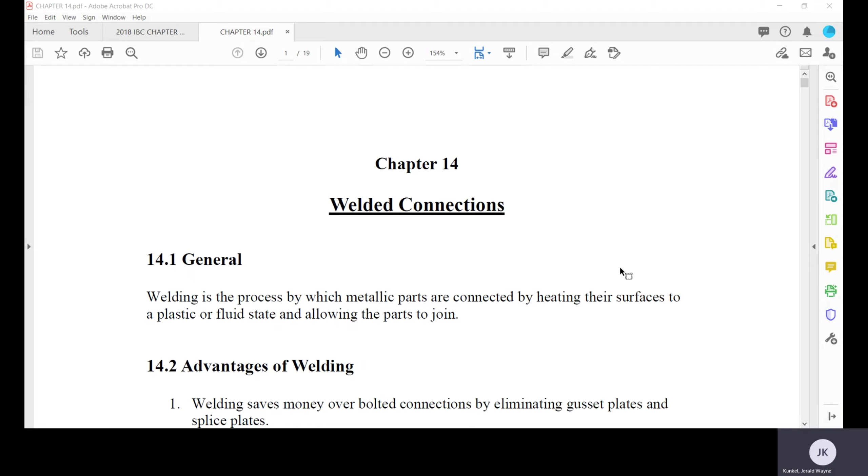So let's get started here. You need to have your welding mask on and your gloves to go through this, because this is pretty high tech stuff here.

You have to be licensed as a welder. There's a 40-hour course you can take at ITT or one of those institutional educational facilities - one of those tech classes you can find. You can learn how to weld. It's about a 40-hour course, and you're tested on the quality of the weld when you're done. You get a certificate suitable for mounting that says you are an official welder.

And if we were to look at specifications for structural steel, we would find specifications for welds, and we'll have time to take a look at that. That's one of those documents that can put you to sleep - it's the AWS, American Welding Society document that goes through welding.

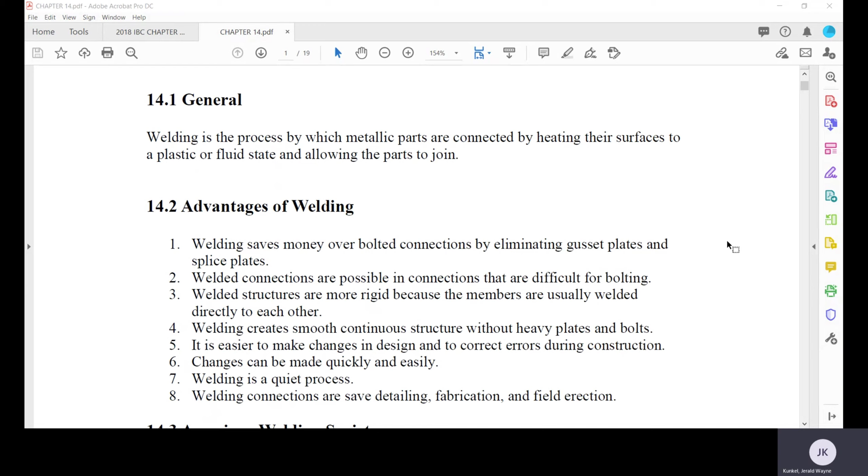Additionally, if you're interested in welded connections and how they work, what you can weld together and what you can't, I'll give you the name and author of the books I have on welding. The best one is called Welded Structures, a book by Blodgett, and I'll write that down on the screen in a minute. Every engineer and designer has a Blodgett book on hand to pick up the finer elements of welding design.

So welding is the process where metal parts are connected by heating their surfaces to a fluid state to allow the parts to join. That heating of the surfaces can be done with a torch or with an electrode. Torches aren't used much anymore.

Welding saves money over bolted connections because it eliminates the need for gusset plates and splice plates. If you want to splice two pieces of steel together, you can simply put the two pieces together and take the electrode and off you go. You can weld those two pieces together with what's called a penetration weld, which would fully penetrate the thickness of the welded part, so that the weld is just about as strong as the original uncut steel member would be.

Welded connections are possible in connections that... just a sec here.

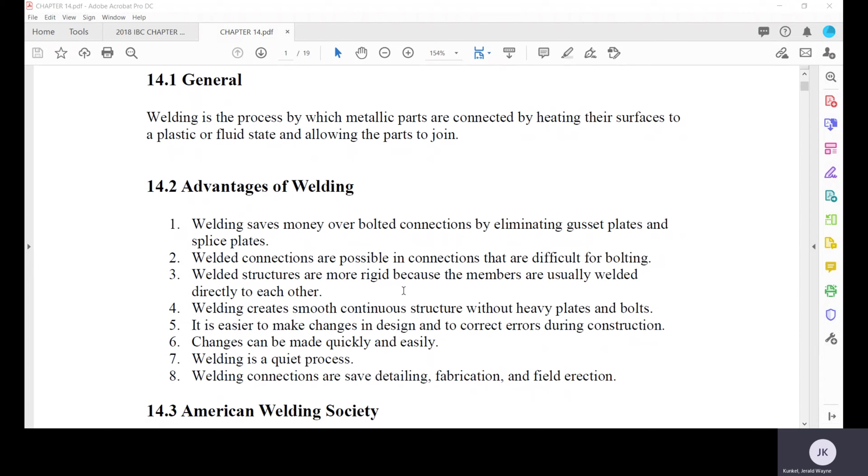I'm going to give you a table that gives you the capacity of fillet welds, which is a type of weld we'll look at. It gives you the capacity based on the size of the weld, in kips per inch.

It's pretty straightforward. In bolted structures we had type 1, type 2, and type 3 connections: the framed connection, the semi-rigid connection, and the rigid connection. The rigid connection took a million bolts to make the two parts connect without any slippage.

With welded structures and welded connections, you don't need to worry about that. When you weld them together, you automatically have a rigid connection.

A lot of architects like welded connections because they're smooth and look better. It's also easier to make changes in design and to correct errors during construction.

It's just as fast to put the electrodes on an already welded joint, melt the weld material, pull the two pieces apart, move them where you need them, and weld them again.

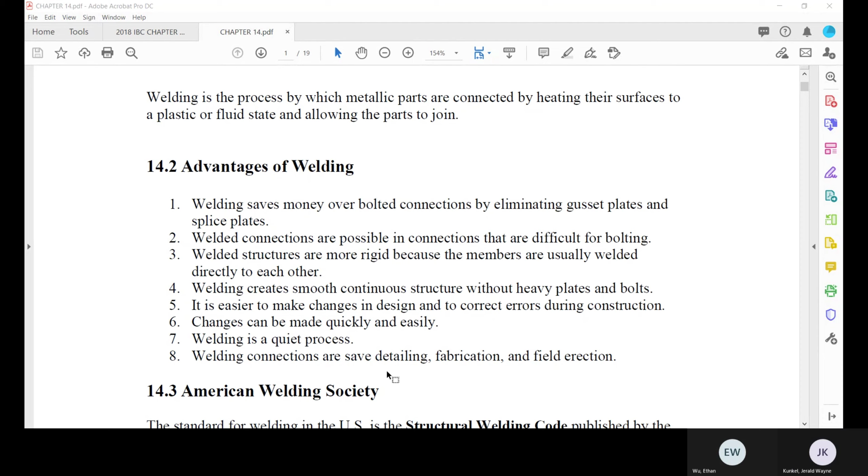Welds are very simple to do. They're quick and easy, it's a quiet process, and welds save a lot of detail. All you do is say, we're going to weld these pieces together.

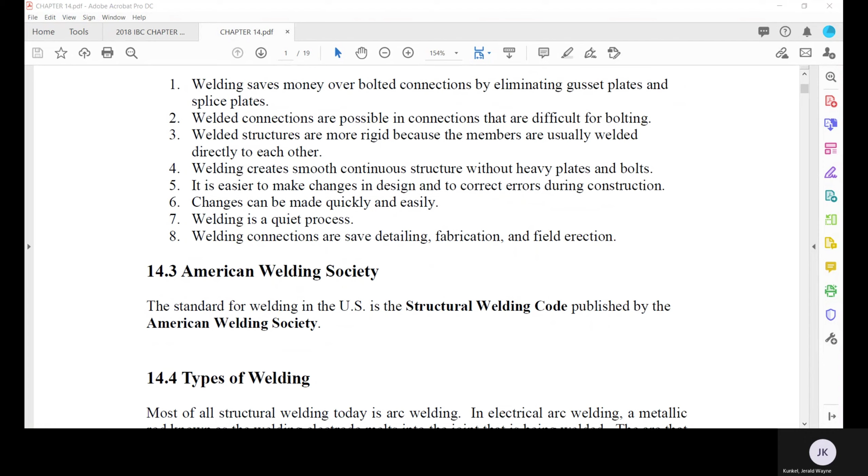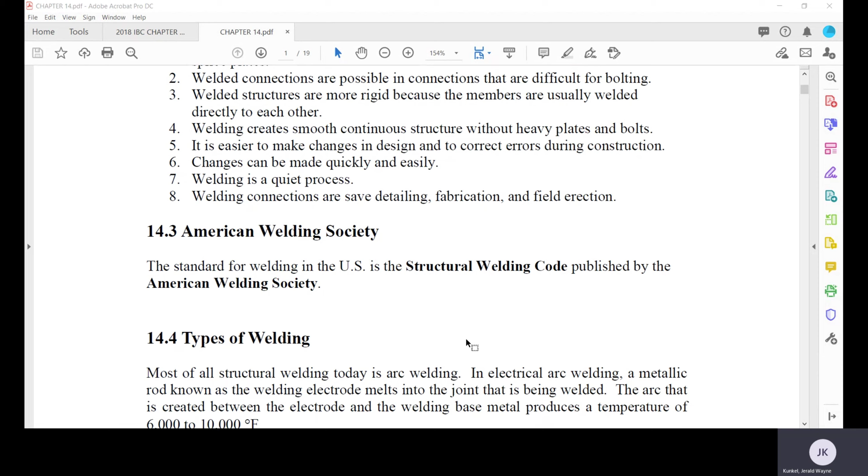Welds are governed by the American Welding Society and the Structural Welding Code published by the American Welding Society. I can give you a link to that if you'd like to study welding further.

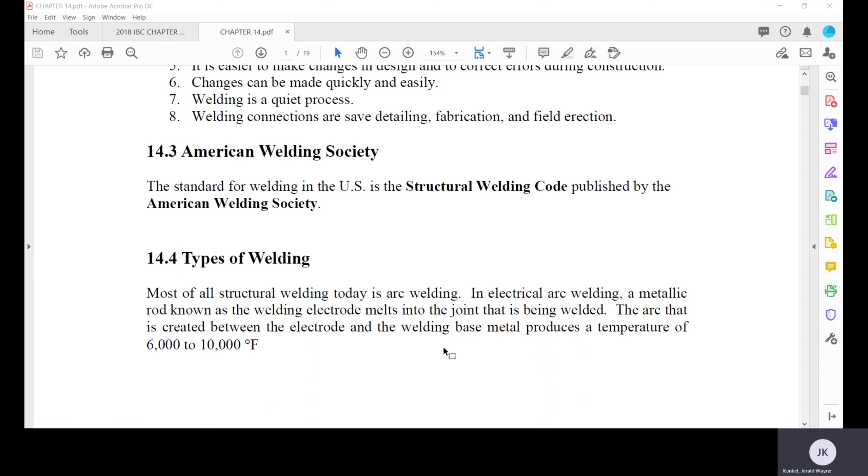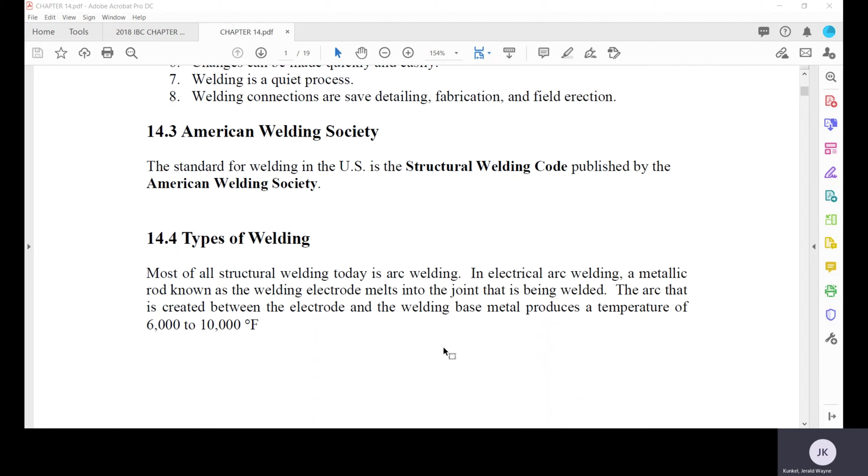Most all welding today is arc welding. Electric arc welding is the easiest way to make a weld—you take a metallic rod known as a welding electrode, and it melts into the joint being welded. The welding of the base material produces a temperature of around 6,000 to 10,000 degrees. Steel begins to soften and melt around 3,500 degrees.

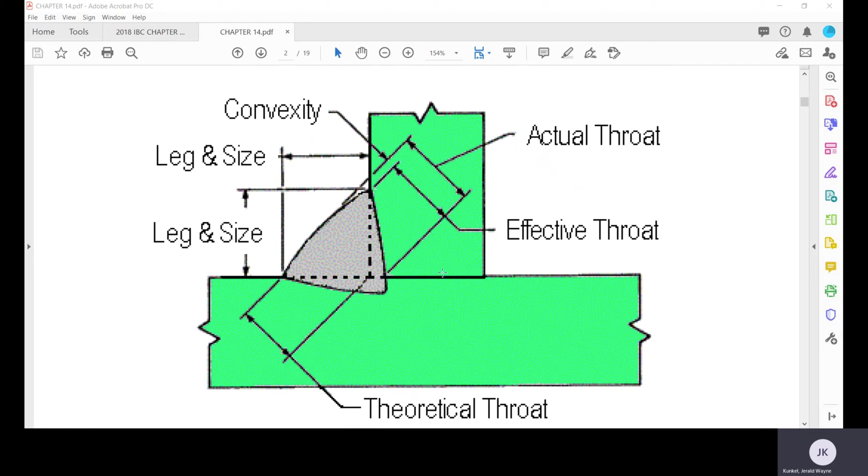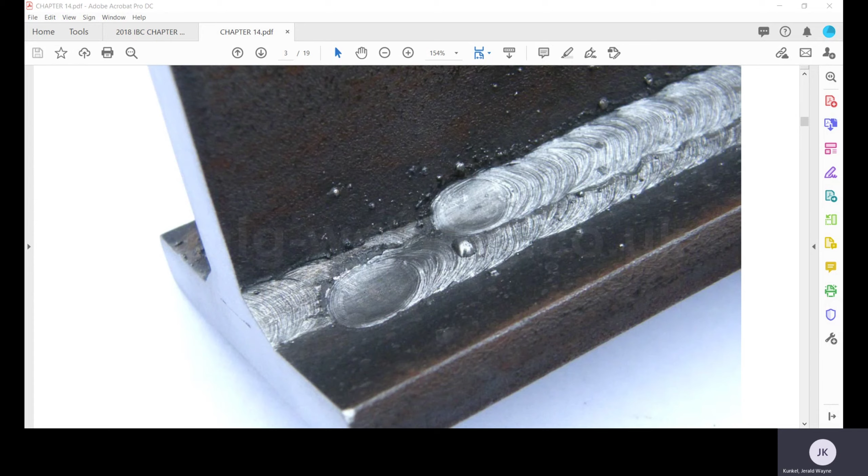There's what the weld looks like—some pictures of welds. Here's a good picture showing the weld has ripples or ruffles. That's because when you do a weld, you move the electrode along the material being welded, and it's difficult to move it in one smooth stroke, so you end up moving it in a series of small strokes, which creates the ridges.

If you're welding two pieces of steel together, the weld can have a leg size of about 1/8 of an inch. So if you have a weld that has to be thicker than 1/8 of an inch, every pass you make is 1/8 of an inch thick.

The welder will lay the first weld down at 1/8 of an inch thick, then there'll be a second layer, also 1/8 of an inch thick, which goes on top of the first. So if you had a 1/2 inch thick weld, you'd have to do that 4 times—the weld would be 4 layers thick.

So you can see we're going to run into a problem: how do we tell if the welder did a good job on the first weld when it's covered by 3 layers of 1/8 inch welds above it? We're going to find out how in just a minute.

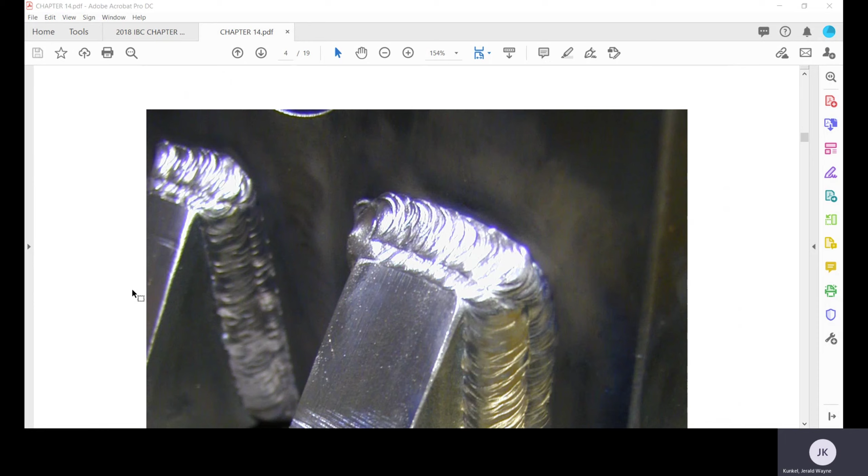Here's another picture of a weld—these are two stainless steel pieces being welded together, and the weld looks similar to the one I just showed you. Nice clean weld. And here's an x-ray of a weld.

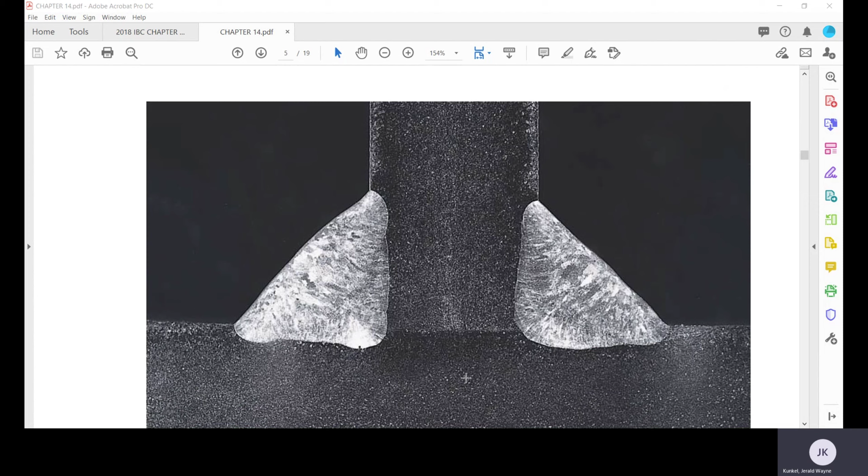So this is what physically happens: this is the base material, this is the weld material. You can see this isn't a glued connection—the base material is mixed, heated, and fuses with the weld material, so the weld material is a combination of the original base material and the electrode, both deposited at the same time during the weld. So we've got two different kinds of welds.

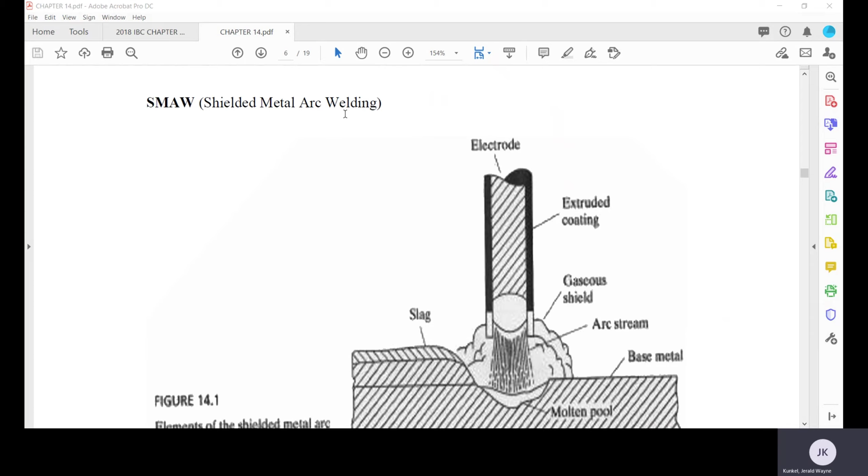The first kind is called a shielded metal arc weld, an SMAW weld. This is the weld that's typically done in the field. What you see here is the base material, and here's the weld material that was left behind.

Here's the electrode, and the electrode is hooked up to the welding machine. I always tell my classes, if you want to weld two pieces of steel together, you can do it with the jumper cables in your car. You'll hook the jumper cables up to your battery. You know how if you touch them together, they spark?

So you take the black lead of your jumper cables and clamp that, because you have to ground it. If you don't ground it, you're going to get a heck of a shock. Then the red lead is the positive end, and this is going to sound crude, but you can take a coat hanger, bend it, and stick it in that red lead. Then wherever the end of the coat hanger touches the steel, it's going to create a spark. And when it creates a spark, that's what you see in this picture.

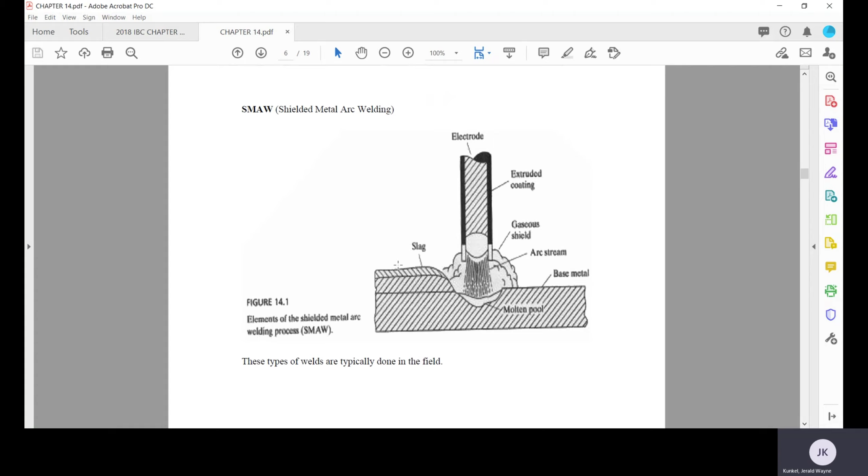There's the welding electrode. This one is extruded, so you can touch it without getting shocked. There's the base material, and there's the arc that's set up. You can see it's melting the base material and the electrode at the same time. There's some slag left behind that you need to take a wire brush and clean. But this is typically a field weld, a shielded metal weld.

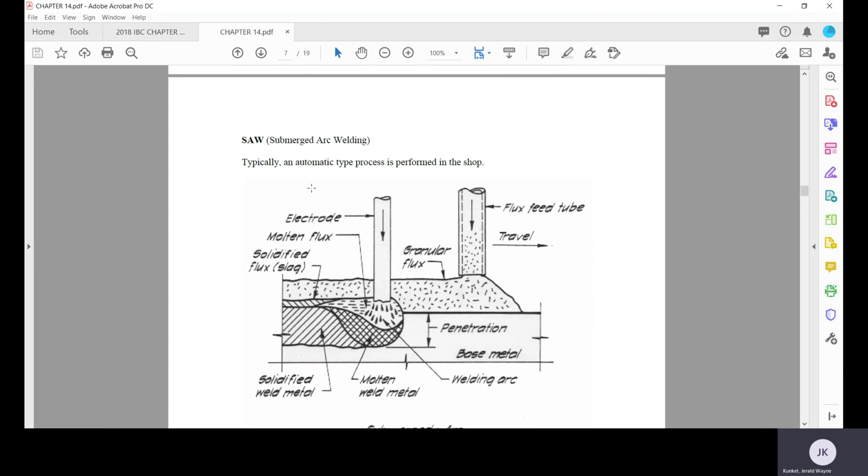Now the welds, if they can be done in the shop, the procedure looks a little bit different. The welds are actually covered with a granular flux, so there's a flux that's poured in front of the electrode. The electrode now is hooked up to the machine in the shop. This is untouched by human hands, so the electrode is not shielded, but the idea is the same.

Here's the molten flux. There's some slag that's left behind. Here's the molten area of the weld metal. This is the penetration, which would be the size of the weld. So this is moving along, and this creates a smooth weld because it's done by a machine. It's a very good-looking weld.

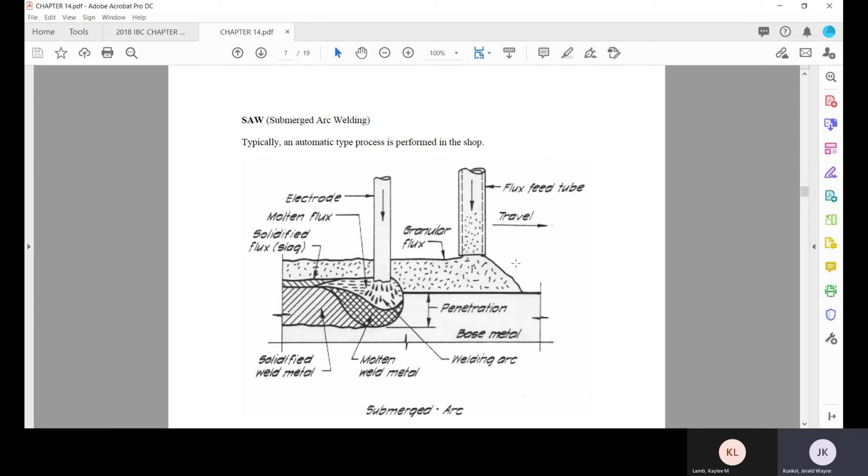So the welds that are done in the shop are called submerged arc welds, SAW, and those welds are pretty clean looking. A lot of times they'll weld the base plates of a column to the column in the shop. If the column has tabs on it that hold some beams, those tabs will be welded on in the shop too, and it's a nice clean weld. It looks better than the field weld does.

As I mentioned, welds are hard to inspect because when you get out there, all you see is a weld. It's not like a bolt with load indicator bolts, where you can go out there and look, and if that fluted end of the bolt is twisted off, you know the bolt's been tightened. Or if you have load indicator washers, you can take your feeler gauge and check the gap at the washers to see if the bolt has been tightened.

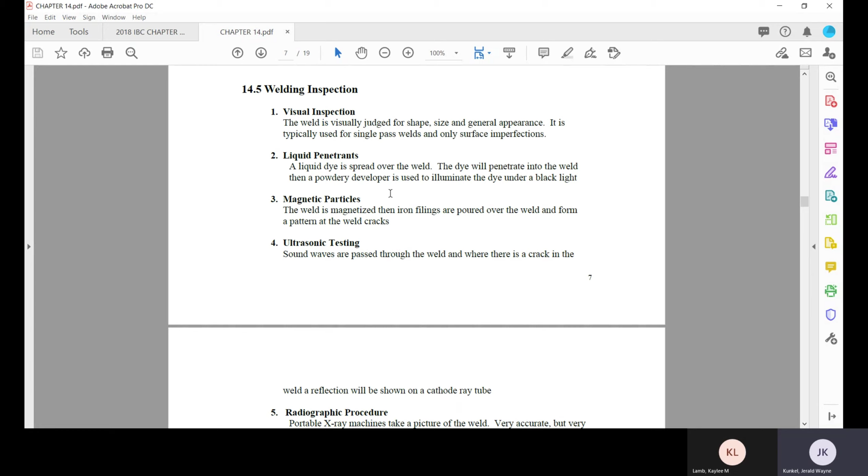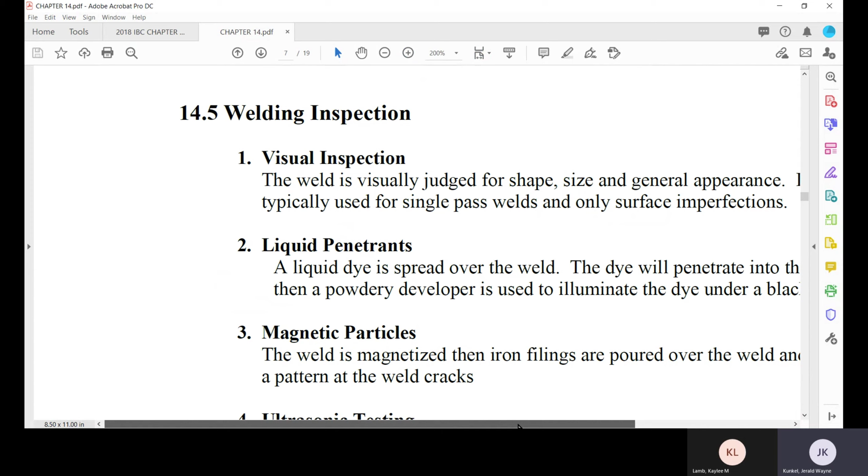Inspecting welds is a little bit different. Visual inspection of welds is not very difficult to do. It just means that you walk up there, look at the weld, and say, yep, that's a good looking weld. Typically, however, visual inspections are only done for single pass welds. We said the maximum weld size can be 1/8 of an inch, so a single pass weld would be like an 1/8 inch fillet weld. You could look at that weld and see if it's the right shape and size, and if it doesn't have any cracks in it and that sort of stuff.

Liquid penetrants are what we use at our office. The liquid penetrants are a dye that comes in a tube or a little bottle, a squeeze bottle, and you can put the dye on the weld and just let it soak into the weld.

And then there's a developer that comes in a squeeze bottle also, that's a powder, and you blow that powder onto the weld, and then you take a black light and run it over the weld and see if there are any defects.

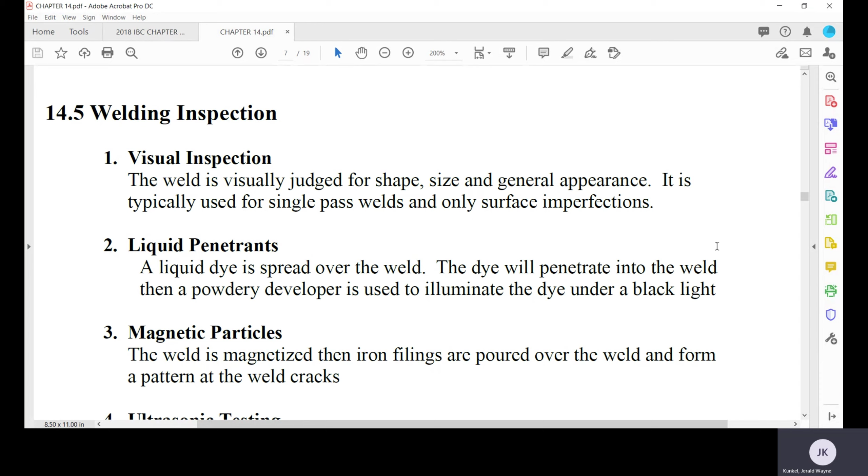Magnetic particles are neat. You can take iron filings and magnetize them, and spread them over a weld, and because they're magnetized, they'll all line up with the weld, all in a line. If you get to a point where the weld has a defect or a crack in it, the little iron filings stop and then start on the other side of the weld, so they're kind of pointing at the crack. I haven't seen anybody do that, but it sounds like it might work.

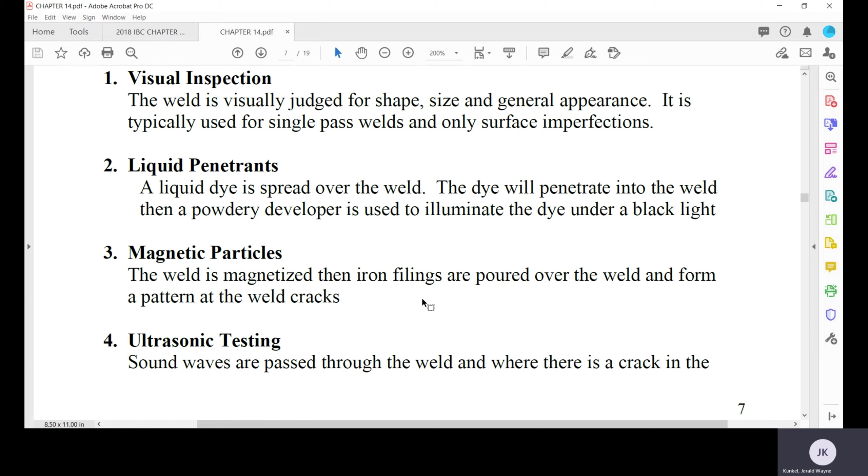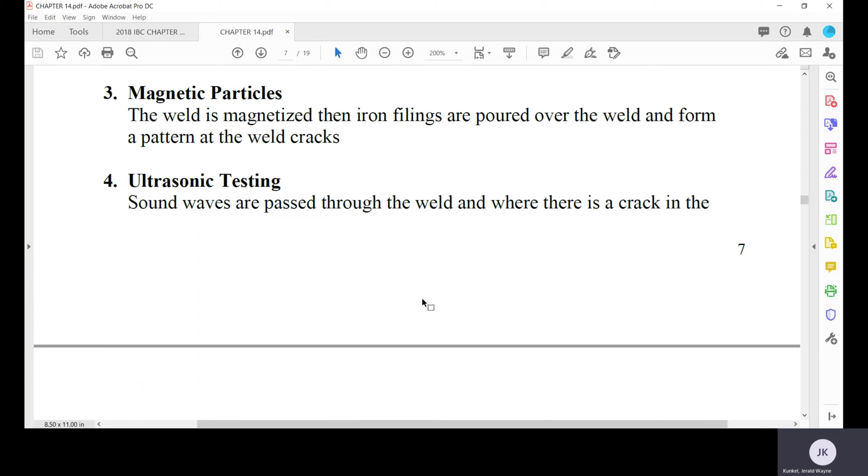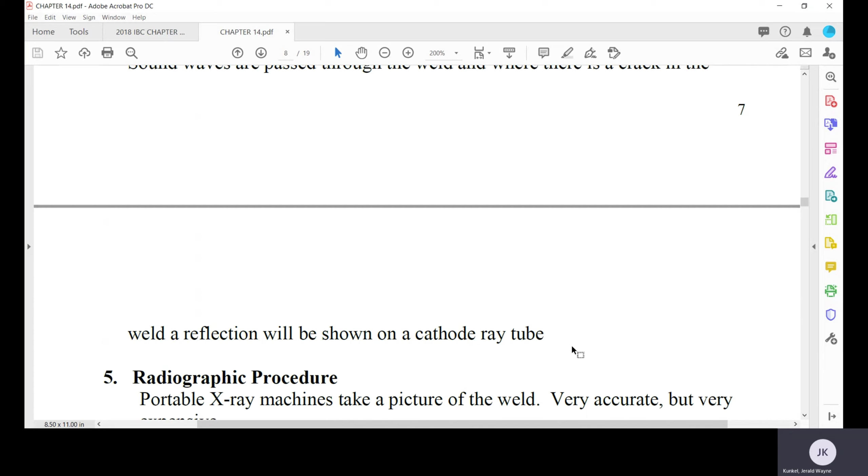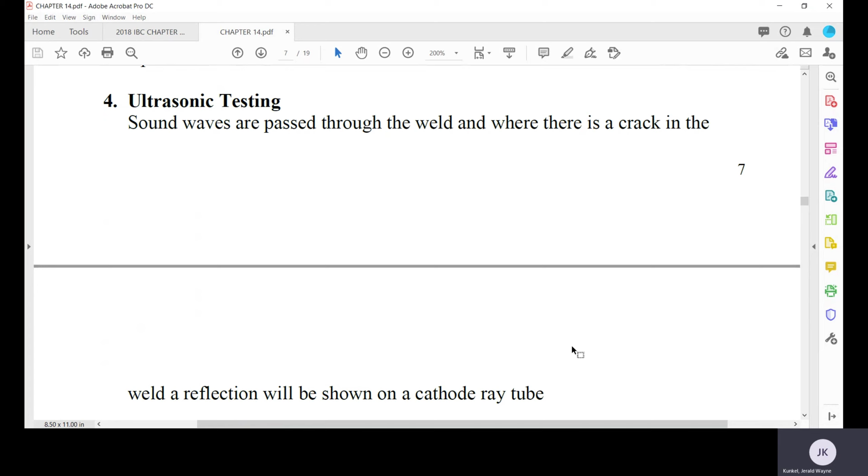What really works are the last two methods. The ultrasonic testing: sound waves are passed through the weld, and where there's a crack, a reflection will be shown on the cathode ray tube. It's just like getting an X-ray or an ultrasound at your doctor's office, and I've done that numerous times here in the last few months, and it's a very useful product.

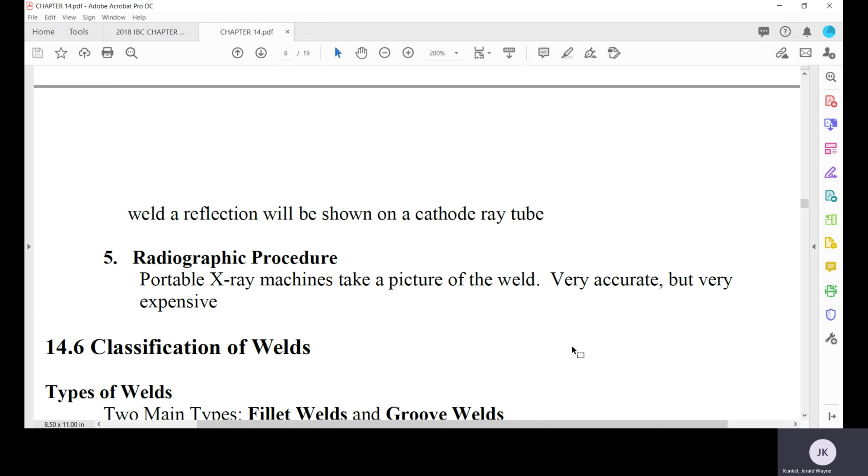And then the last is to X-ray the welds. Typically this is extremely accurate, but it's also very expensive to X-ray a weld. It's actually cheaper for you to get a chest X-ray than it is for you to go out in the field and start X-raying welds. But they show you exactly what the weld looks like.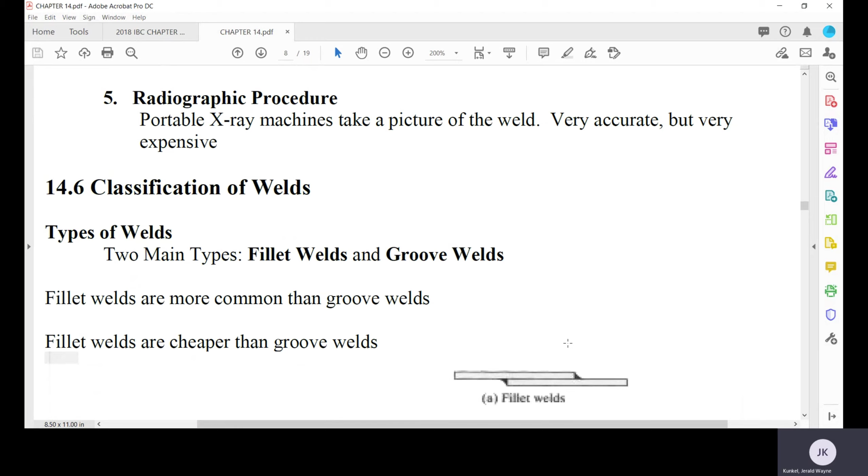We're only going to discuss two types of welds: fillet welds and groove welds. And of those, the fillet welds are going to be more common. There's what the fillet welds look like if we're welding two plates together, and those are the cross sections that I've been showing you.

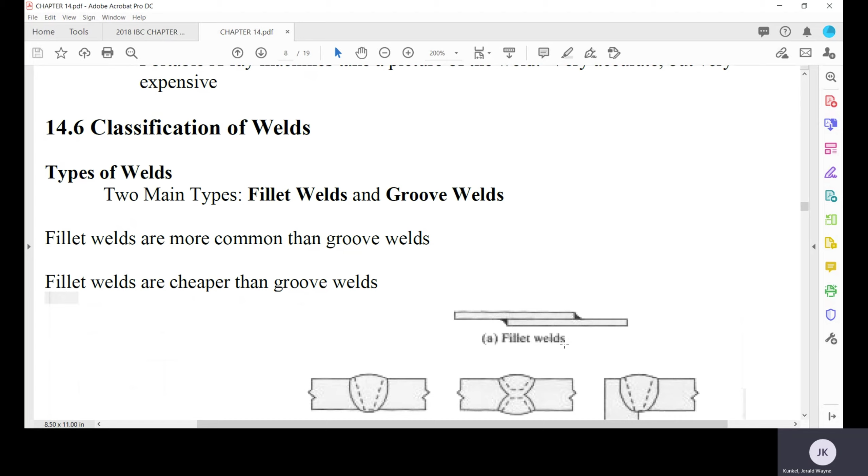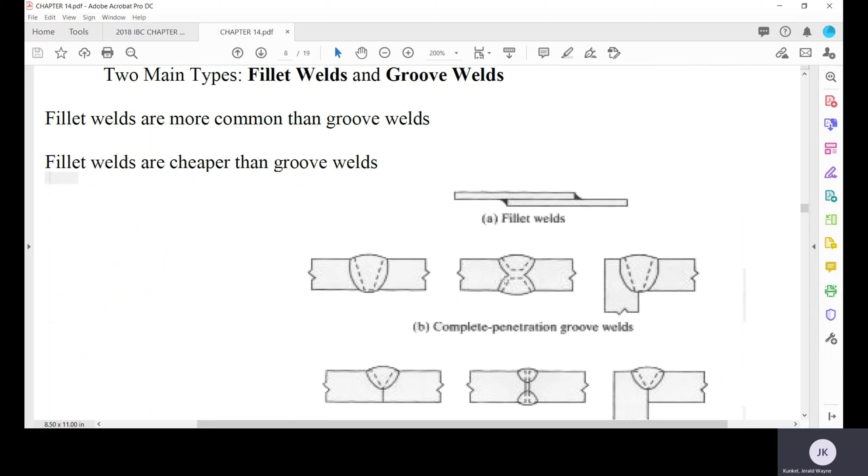Those are fillet welds. The groove welds can be complete penetration welds, meaning they penetrate all the way through the base material from one side to the other. They're called full penetration welds, and that's what I use to splice beams and columns together. Additionally, you can have groove welds that are partial penetration groove welds, and then there's some miscellaneous welds.

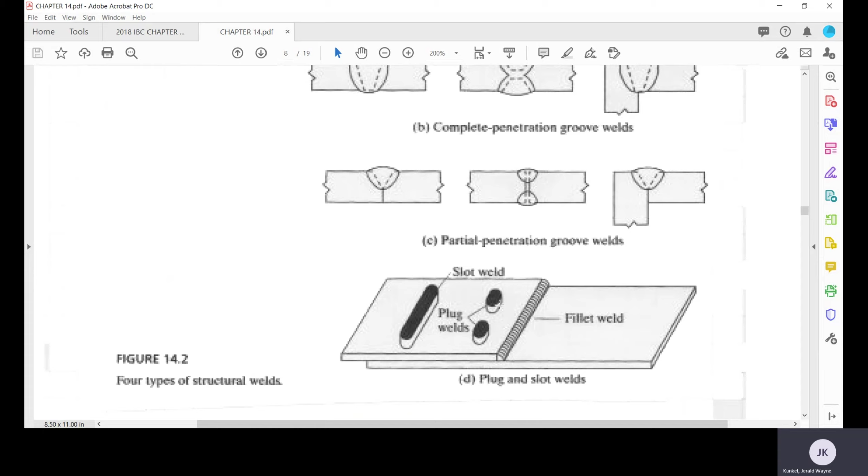Here's the fillet weld. The plug welds are used, typically both plug welds and slot welds, to attach metal deck to steel beams. So if you've got metal roof deck, you specify how often you want a plug weld, and they walk along and touch the roof deck with the electrode. The electrode will actually burn a hole through the roof deck and fuse it to the steel beam or joist below, so the plug welds are very efficient.

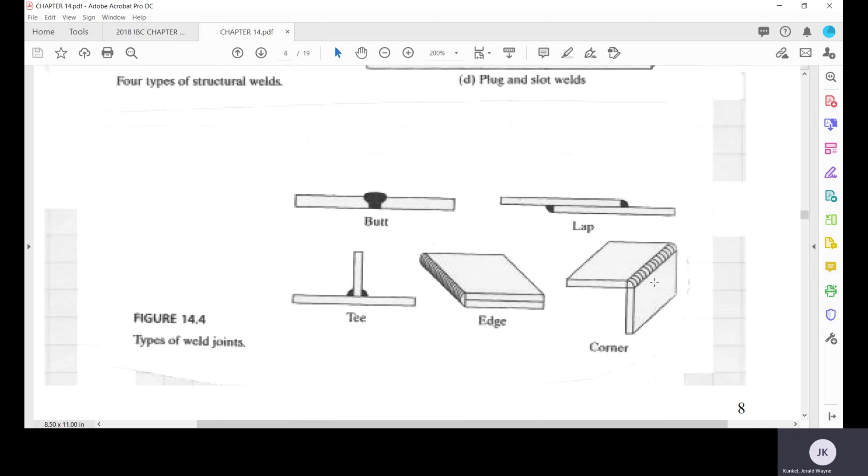Of the weld joints, they can be T-welds, edge welds, corner welds, lap welds. You can just about weld anything you want together.

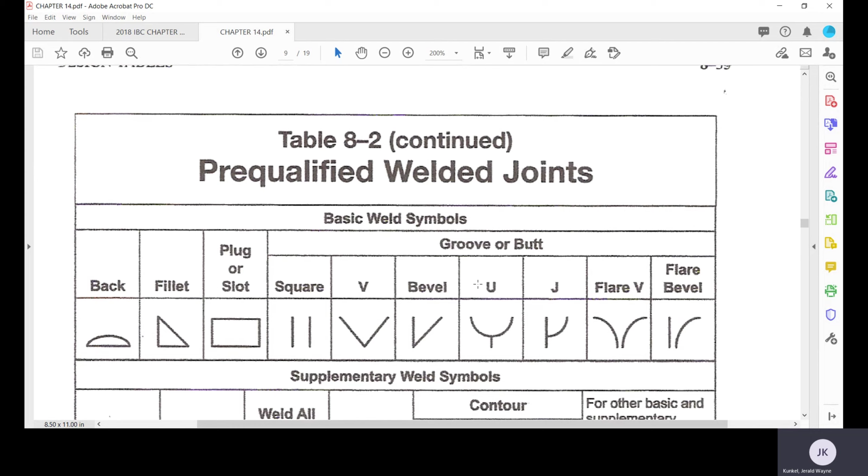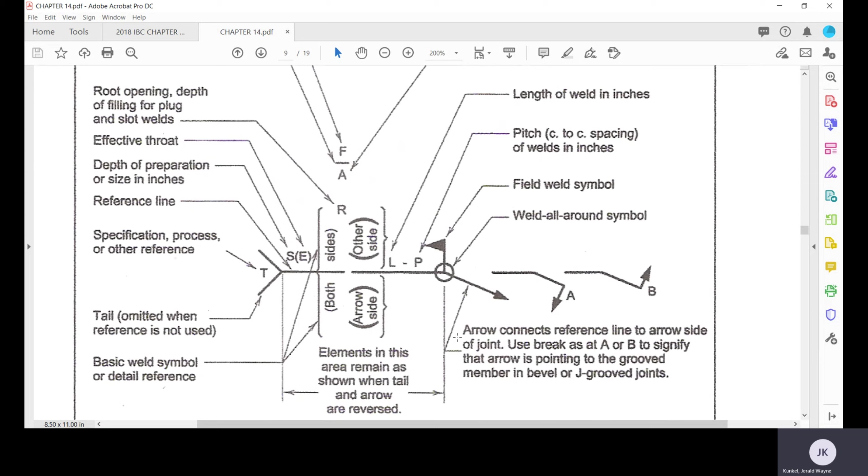This is table 8-2 from the Steel Construction Manual, and this is the weld symbols. This is how you talk to the welder. The welder has a license, so he knows how to read the weld symbol. You've probably seen them on drawings before: a little line with an arrow, and sometimes it'll have a flag on it. Those are weld symbols that go on your drawings that direct the welder how to weld the materials together.

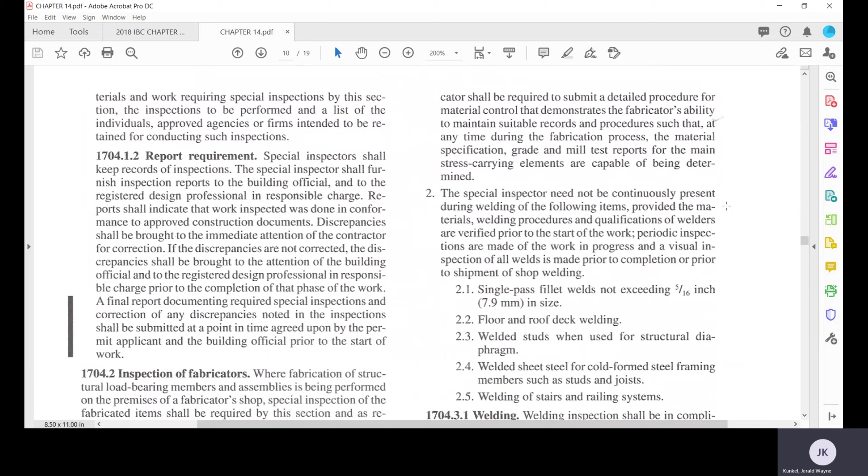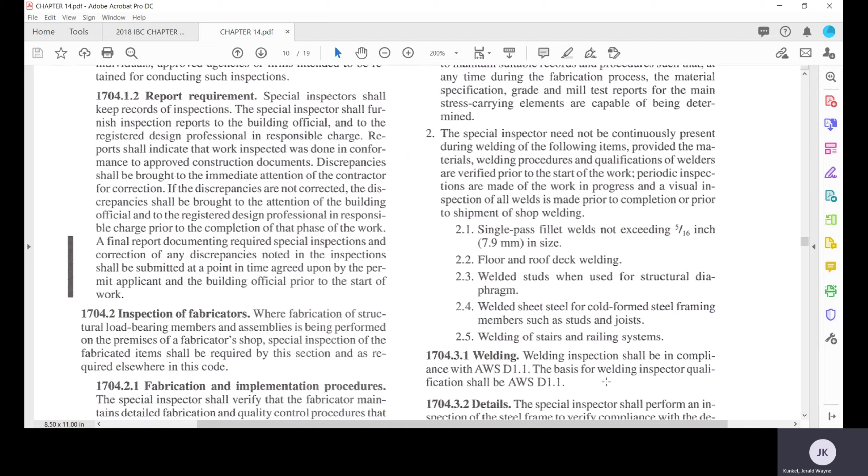Here are some basic requirements for welding. As I said, welding inspection shall be in compliance with AWS, the Welding Society. D1.1 is the actual document that controls or specifies welds.